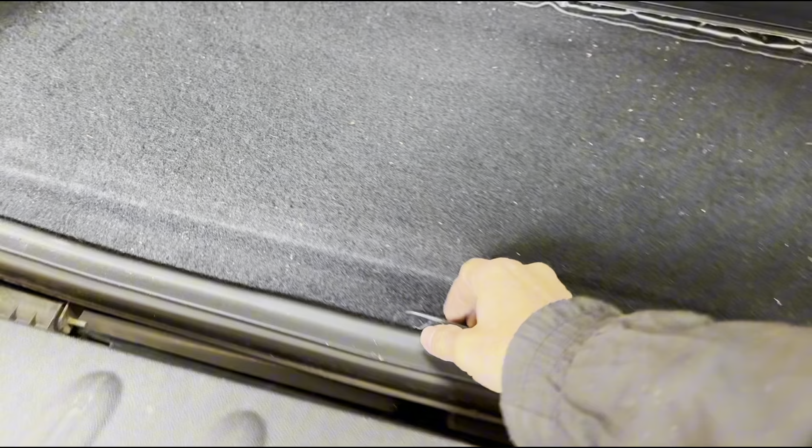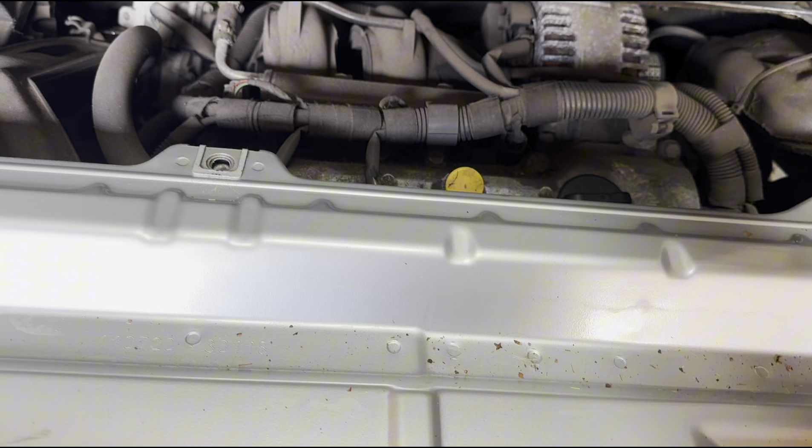And also we're going to open this door here. So then I'm going to get to this bit that's supposed to be here. I just want to lift this up, then open this little thing here, and then we can open this cap. From here, you can actually remove this little cover, but I may just put it there temporarily.

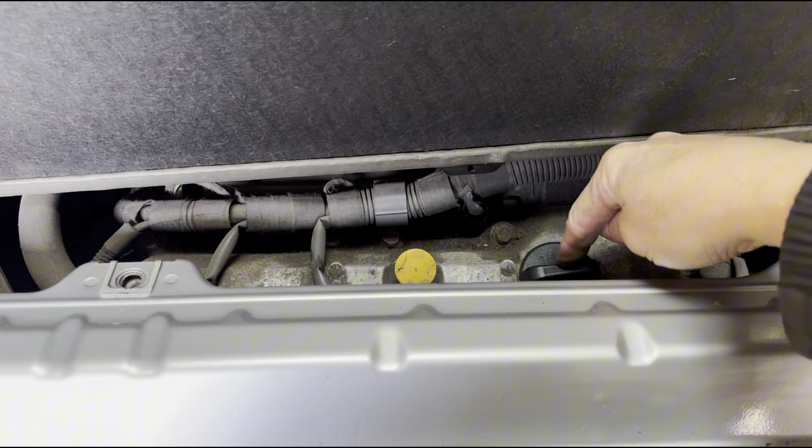I want to open the oil filler cap here and pull the dipstick as well. I just want to open those two in order to allow some air into the system while we drain it. So I'm just going to leave that there sitting.

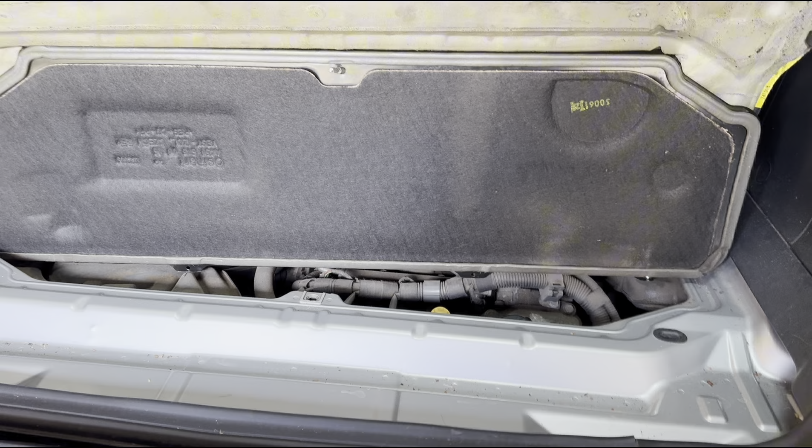Now I'm going to get the car up and I'm going to drain the oil and change the filter from underneath. It's a fairly simple process on this car.

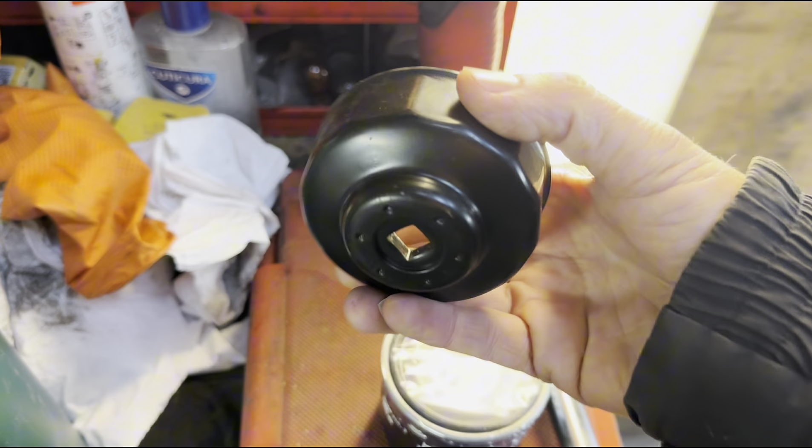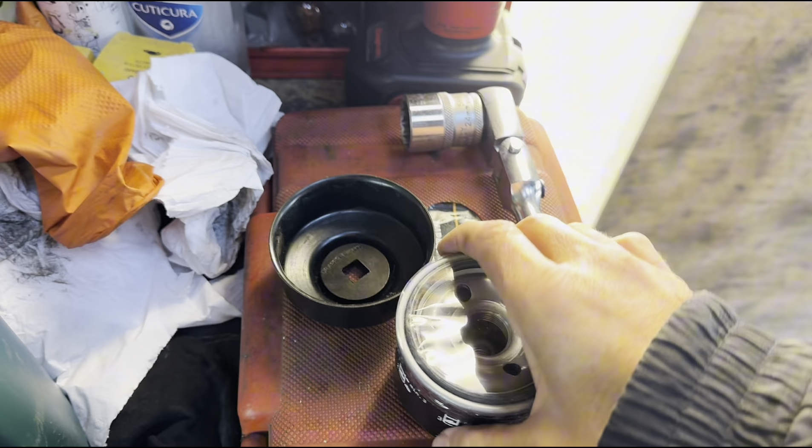So what I have here is an oil filter, and I have a tool for removing the old oil filter. This tool is a size 68. This fits that, but I'm not going to be using it for refitting the filter, just for removing.

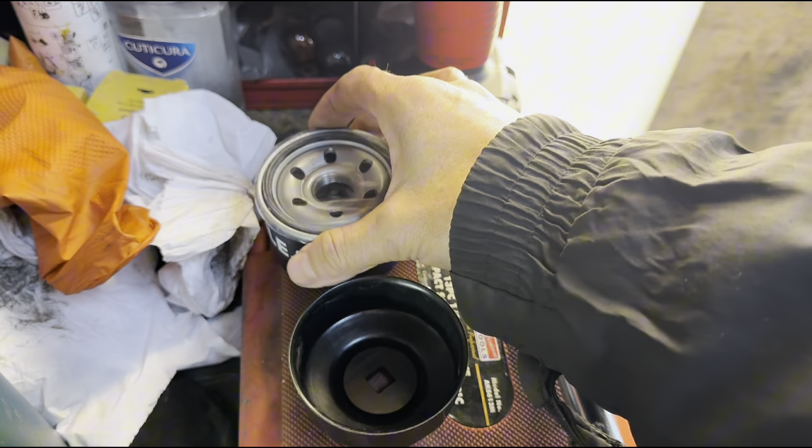When we refit the filter, we just do it by hand, hand tight. I'm also going to use a 24mm socket to remove the sump plug bolt to drain the oil. And also I have some oil now.

They do recommend 0W40. This isn't the oil I'm going to be using, because this one is C3, mainly for diesel engines. So I am waiting for the correct one to come to me. But they do recommend 0W40 or 5W40, and it's best to use the one for petrol. This is mainly used for petrol as well, but I think the C3 is most focused on diesel engines.

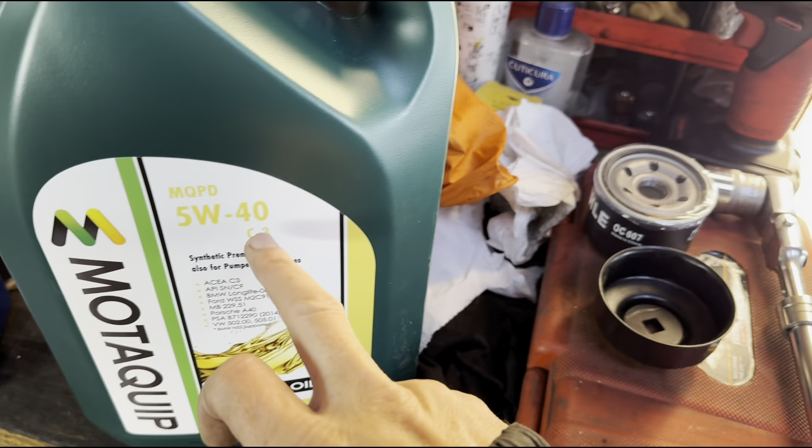Anyway, use the one for petrol, so not this one. And that's pretty much it.

So what I'm going to do first is get an oil pan. This is the back of the car, and this is the sump plug here, and we are going to crack that open.

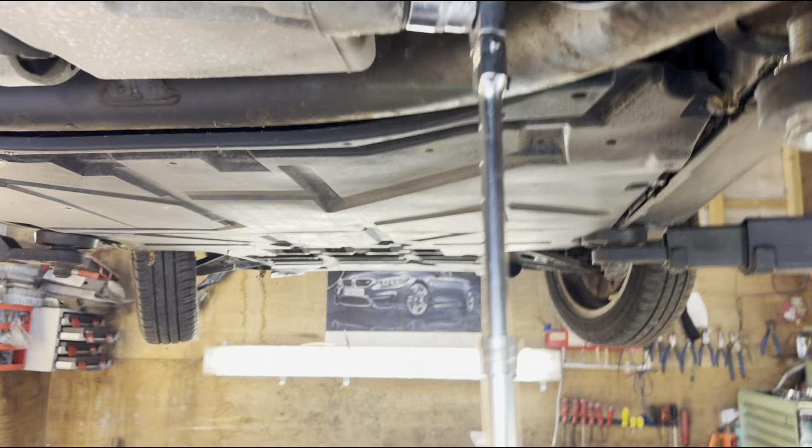It is quite a big bolt, so I'm not sure how tight it will be, but I can extend my wrench. This is a really good wrench, by the way. It was a little bit tight, but anyway, we crack that open.

Now get your oil pan underneath, and then we can take this off. Also, if the car has been running for a while, the oil can be very hot. In this case, I only ran the car for 10 minutes or so just to warm it up, so I can drain my oil and it's not really that hot.

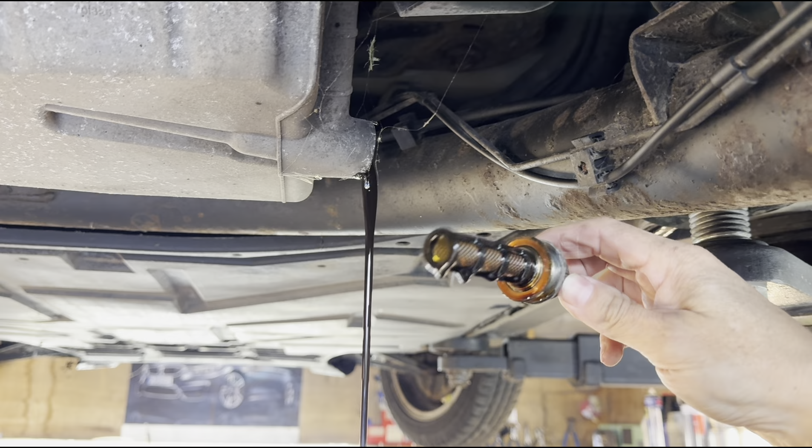Okay, there's a big washer there, and to be honest I haven't got a big washer to replace that, but it is recommended to replace the copper washer. There's a little filter there as well.

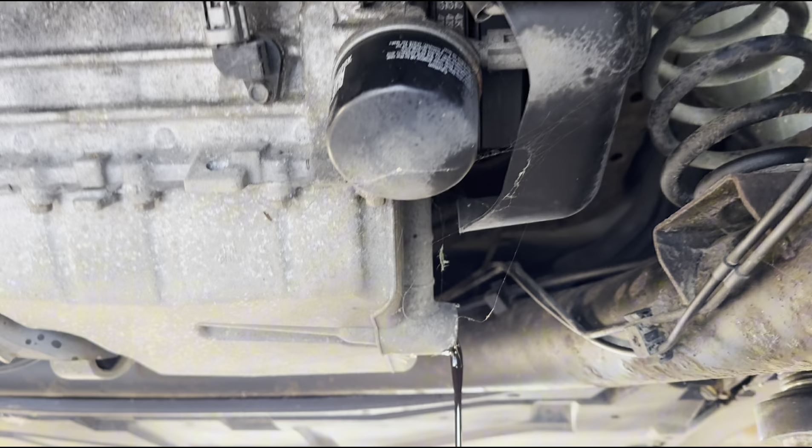So we can clean this and let the oil drain for now, and then we can take the filter out as well. This is the filter I'm using, by the way, the MAHLE one, OC607.

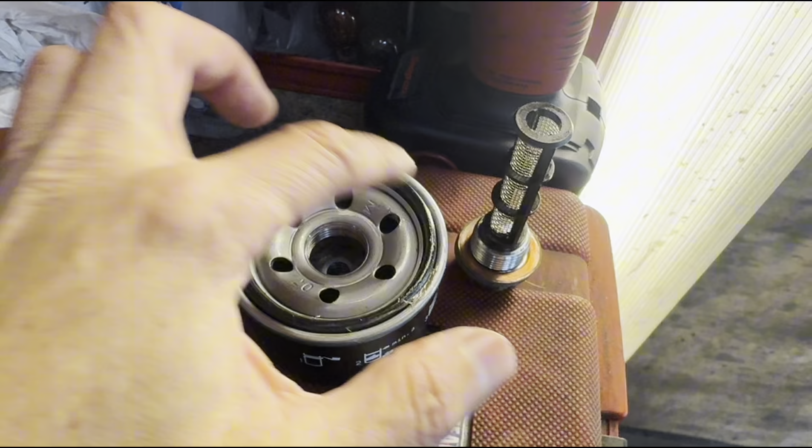I was just preparing my filter as well, so I removed the plastic cover that was on here, and I've put a little bit of multi-purpose grease on the O-ring there. You can also use a bit of oil on that O-ring. I normally do that so when we close the filter, the O-ring smoothly rotates as you're closing this.

I believe that if it's dry, sometimes it can get damaged, but I'm pretty sure many people have done it without ever having to put grease on it. So there's always different experiences out there.

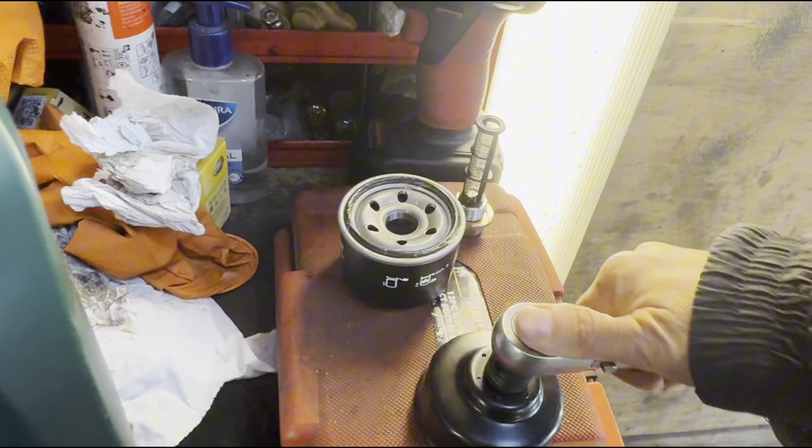And also I've cleaned that, but I would recommend, if you're doing the job and planning ahead, get a washer, which is something that I didn't, and I haven't got one of those. That's quite a big one.

So let's get this. This is still draining. Technically there is supposed to be 3.7 liters, I think my supplier said.

Now also get your oil pan sitting under that filter, because it's going to drip some oil. And so this oil filter, again, it's not supposed to be in too tight.

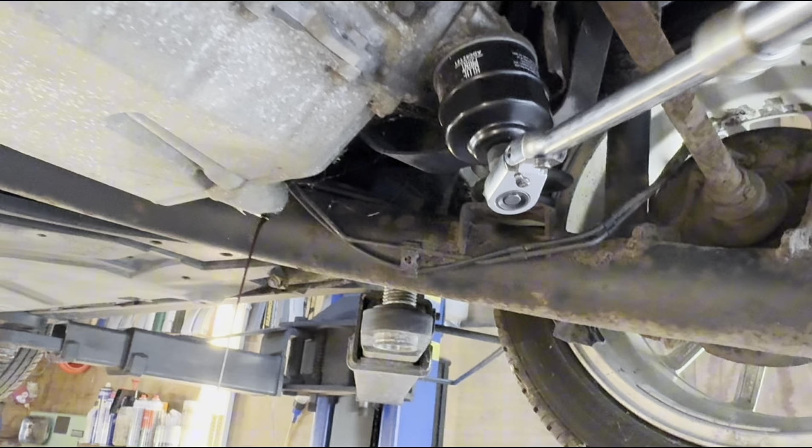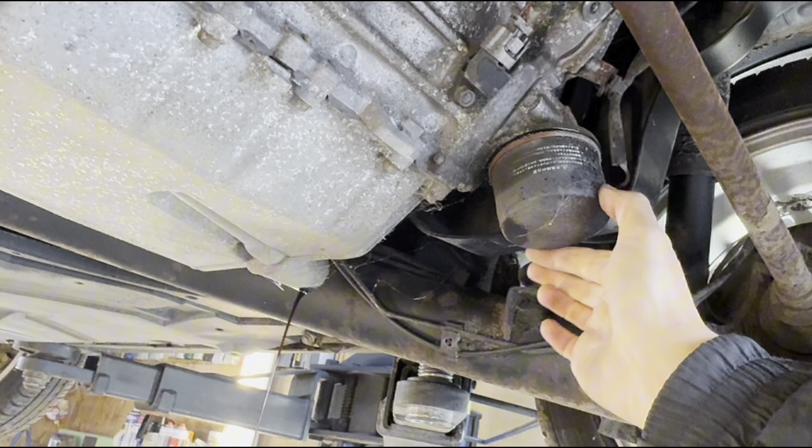The one they used, I can see, is a Blueprint one. I'm using a Mahle one. Not really a huge difference there. I think Blueprint is German, but Mahle also German. So some oil will drip.

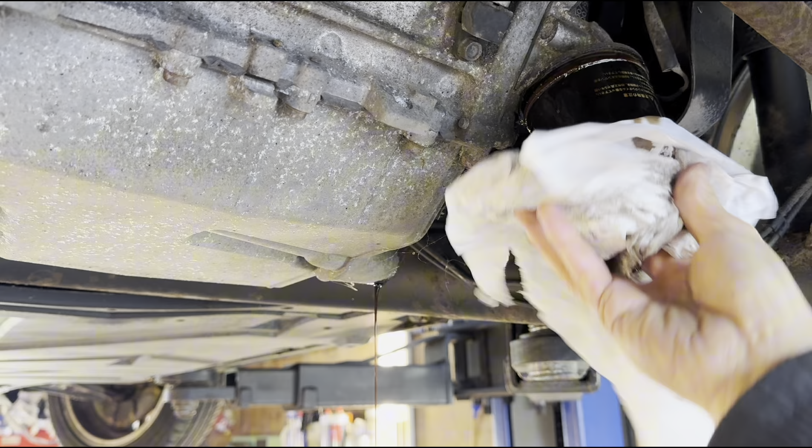You can just take it out of there. There'll still be some oil in there once you get it out, so you can drain it into your oil pan.

Changing oil and filters is always a messy job. Oil goes everywhere for some reason. If you haven't made a mess here and you're feeling lucky, don't worry — somewhere along the line you're going to drop some oil on the floor. Just kidding, I'm sure you can manage without that. I don't know why I still can't, but one day I will.

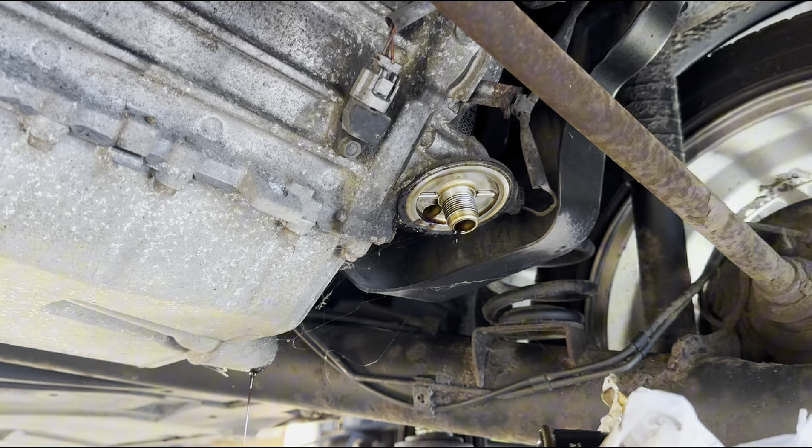Now we can let this drain for a while. We already have our filter ready, but we're also going to clean this area here, make sure it's nice and clean before we fit our new filter. What I noticed is that the filter I removed had a little bit of corrosion on the side, so I want to make sure there's no corrosion here, because that can cause a leak if the new filter doesn't sit properly. This seems to be okay, but it does need a bit more of a clean.

I may need to use some brake cleaner, which is a sort of solvent that dissolves grease, because you can see this carbon has formed around the filter. Those little things, with time, become bigger and bigger. So you don't always have to keep cleaning it, but one day it will become thicker and your oil will start leaking from the side. It's best to give it a clean from time to time and get rid of that carbon.

You can see it's coming up with my nail there, so we might be able to spray some brake and clutch cleaner, and it might melt it away.

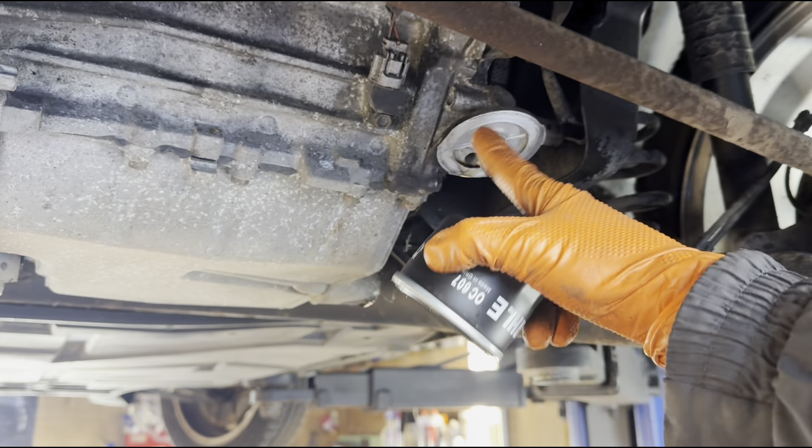Okay, I left this draining for a while as I went to have lunch. Now I've cleaned the area nicely — you can see it's nice and shiny — and I'm going to put my filter back on, the new filter.

Just tighten it by hand. Now we can put our sump plug bolt back on as well. Let's get this sump plug bolt back in there. As I've said many times, I recommend changing the washer, which I will not be doing myself today because I haven't got one.

Now I was trying to find the torque setting for this bolt, and I found some torque settings of 50 Newton meters on one site and 65 on another. It is a pretty big bolt, so what I've done is set my torque range here to 56 Newton meters, just to see how that feels. Okay, so that's 56, and I think that could easily go to 60.

I just set my range to 63 Newton meters, and we'll see how that goes. Well, there we are — I got it on 65 now. I just wanted to go in stages just to make sure I don't damage anything, but that's it. You can actually tighten it to 65 Newton meters. I thought it would be quite a lot of force, but it's pretty much doable, so I guess they were right at 65. That was done with a 24 mil.

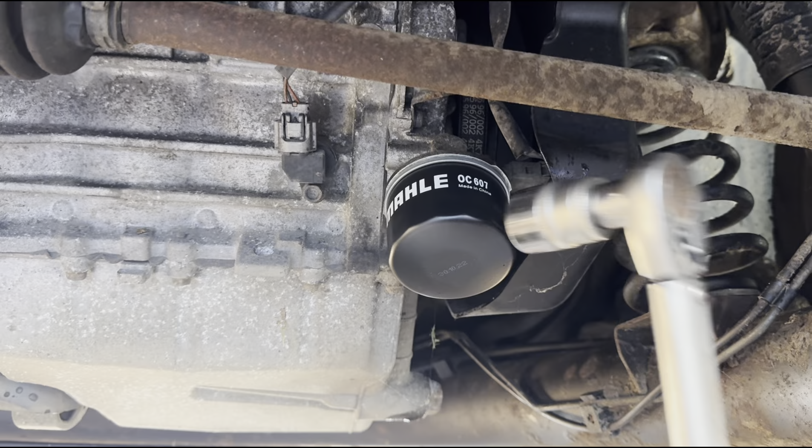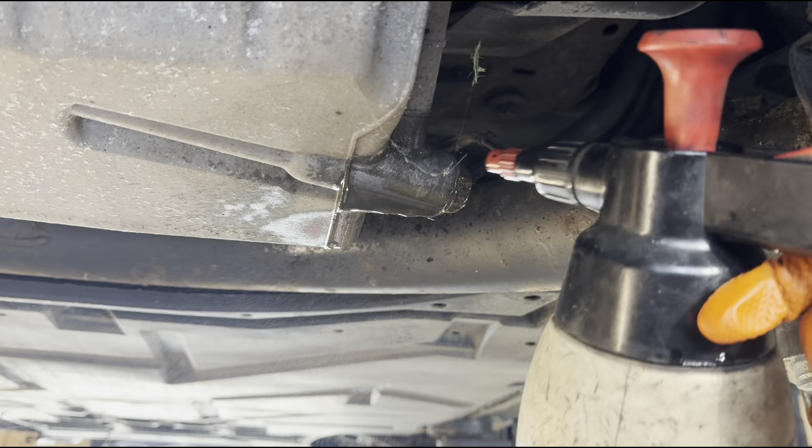So that is on. Now we can lower the car and put some oil in. Don't forget to clean the area, otherwise you might think that's a leak. If you leave it nice and clean as it was, if there is a leak for any reason — in my case it would be because I didn't change the copper washer, but if it's for another reason — you can monitor that situation. Make sure wherever there is oil you clean it, so next time if there's any oil you can try to see where it's coming from. If you didn't clean it, you might get confused as to whether there was oil you left or that it's leaking. So anyway, I'm going to lower the car now.

This fluid, by the way, is as I mentioned, brake and clutch cleaner.

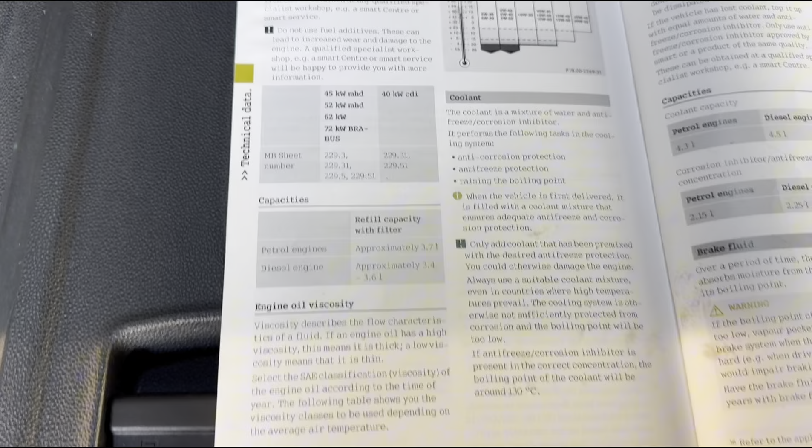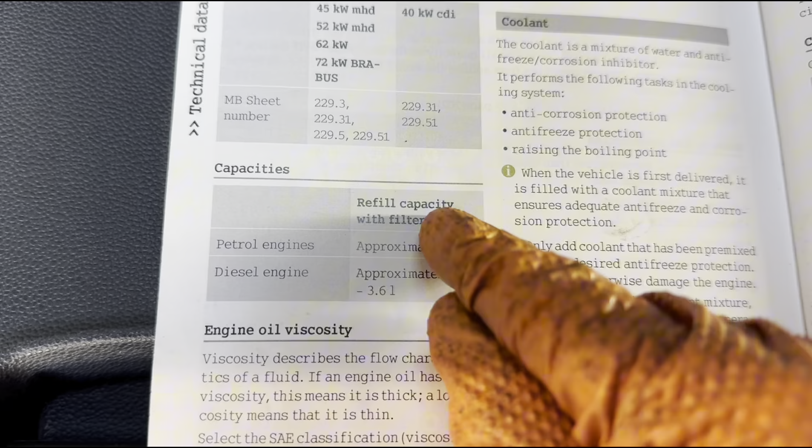Time to top up some oil. I've got my manual here, and the oil capacity stated is for petrol engines approximately 3.7 liters — refill capacity with filter, so 3.7. If you have the diesel version, it says 3.4 to 3.6 liters.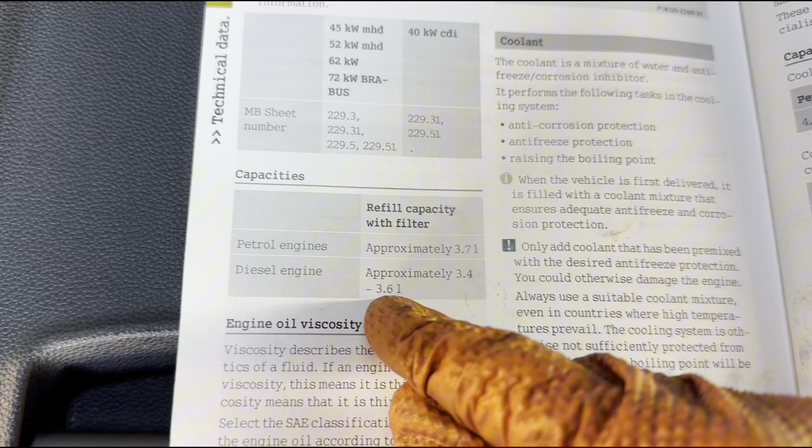So this is a 1 liter engine, the 2011 451, and it talks here about the engine oil viscosity. It asks you to choose the oil viscosity according to the time of year, and shows a list of the types of oil you'd choose according to temperature.

I'm here in the UK and the temperatures are never extreme either way, so this is why I normally use 5W30, which covers a good range of temperatures. However, if you were in a very hot country, you'd choose something like 20W40 or 20W50. And if you're in a very cold country, you could choose 0W30, 5W30, or even 0W20 in other cars.

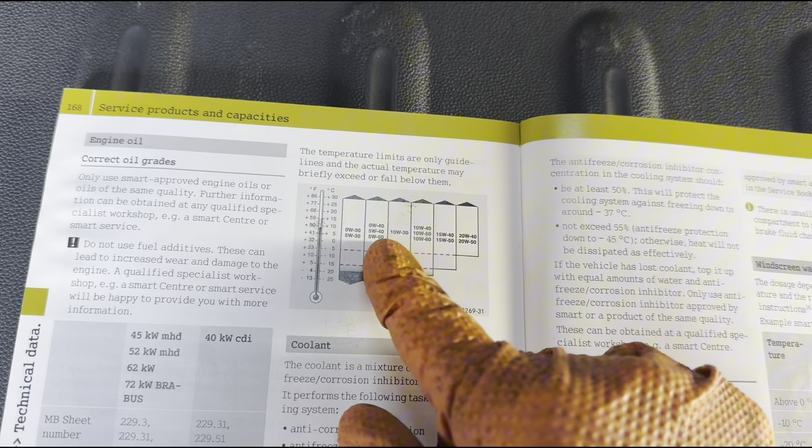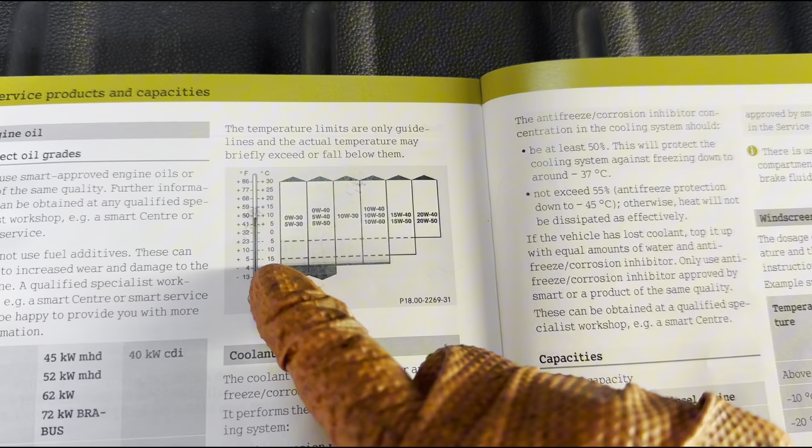So today the oil I have is 5W40, and again that covers a wide range of temperatures, down to -15, -20, and up to +30, so that should be just fine. And as we saw, 3.7 liters is what I'm going to be adding.

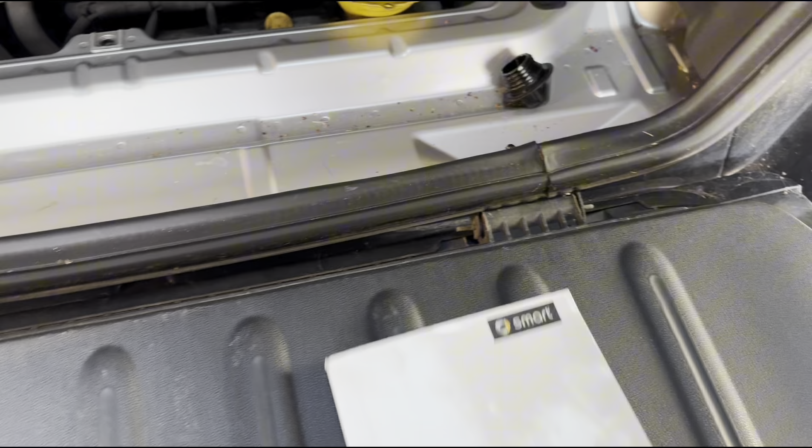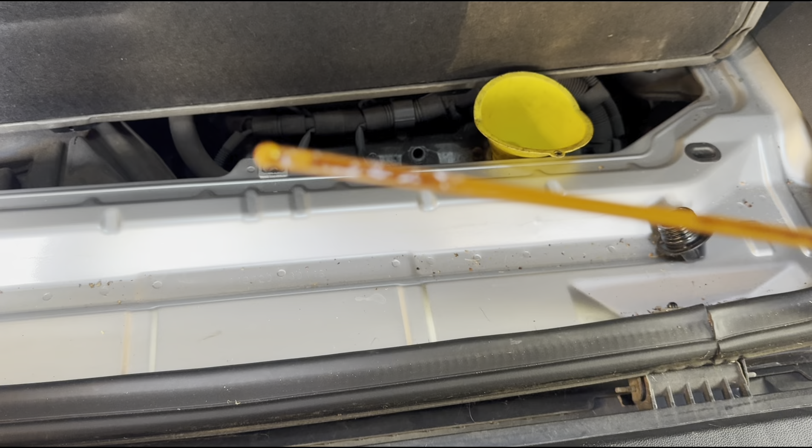I've got a funnel there, so what I'll do is pour the oil in, and then we can check the dipstick. The dipstick is here, it's quite a long one, but it does have a min and a max. We'll look at the manual in a minute, but we want to be somewhere in between the min and max, probably towards the max since we're just changing the oil.

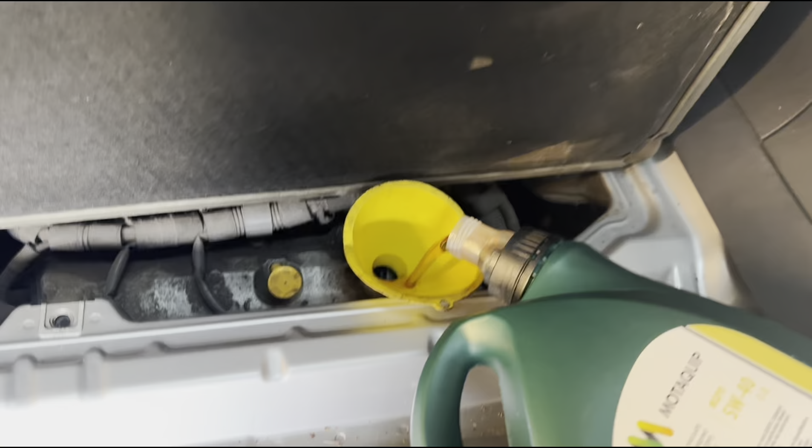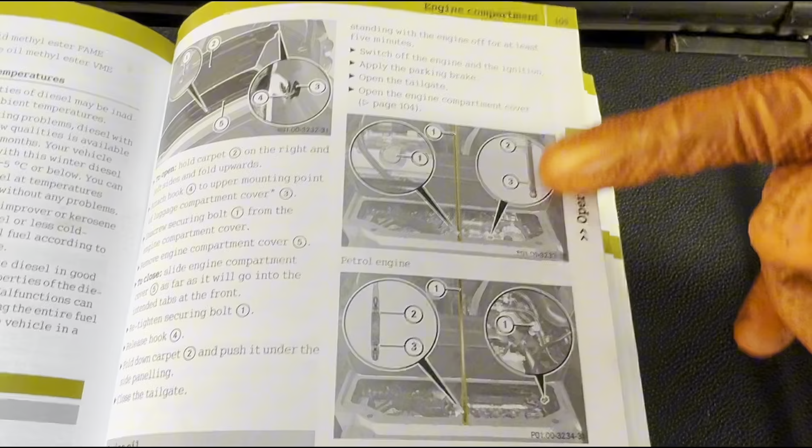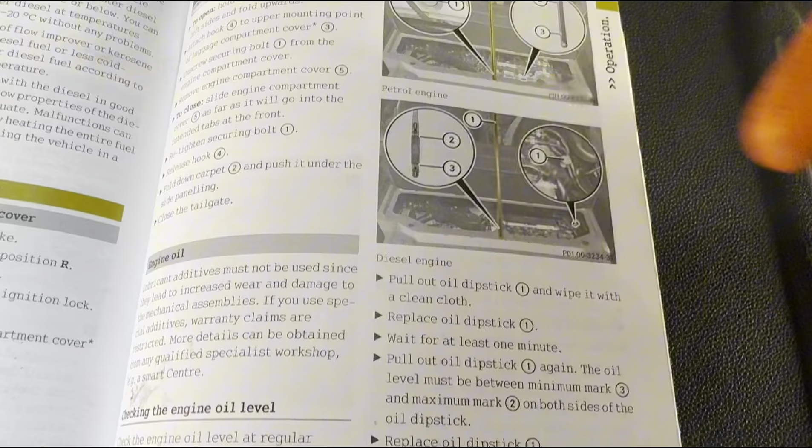Okay, looking at the manual again for the dipstick. I have this dipstick here, you can just about see there's an L and an F there, bit difficult to see to be fair. So we have low and full, and this is the dipstick type that I have. What they say is between 2 and 3 we have full and low. Same for this type of dipstick, slightly different looking, but I guess that's the diesel one and this is the petrol one.

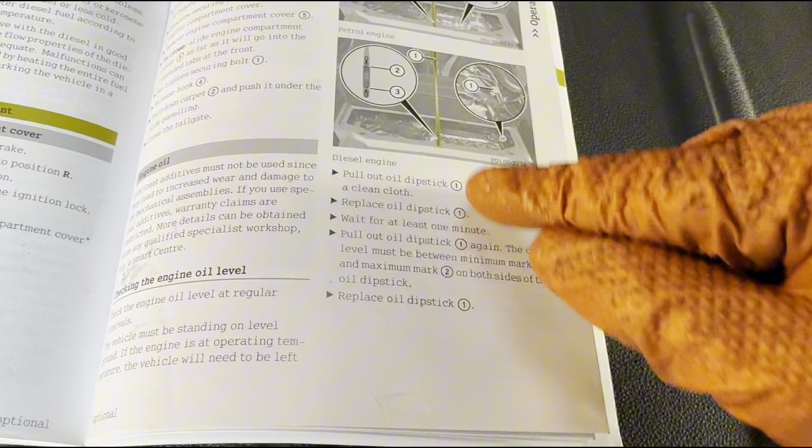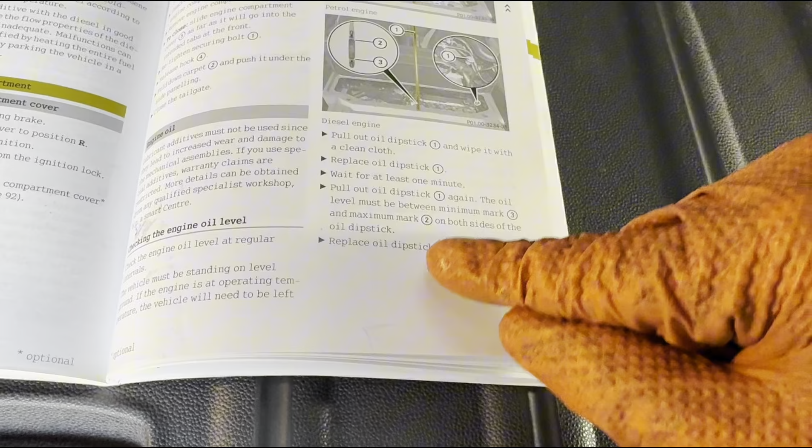It says pull out the dipstick, clean it, replace it, wait about a minute, pull it out again. The oil must be between minimum mark 3 and maximum mark 2, then replace it. You'd do that if checking the oil halfway through the year, but today we're checking it because we just did an oil change, just to see where it's at.

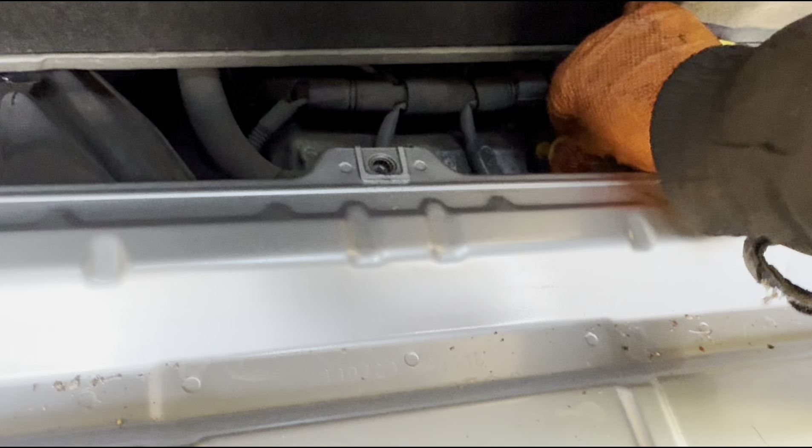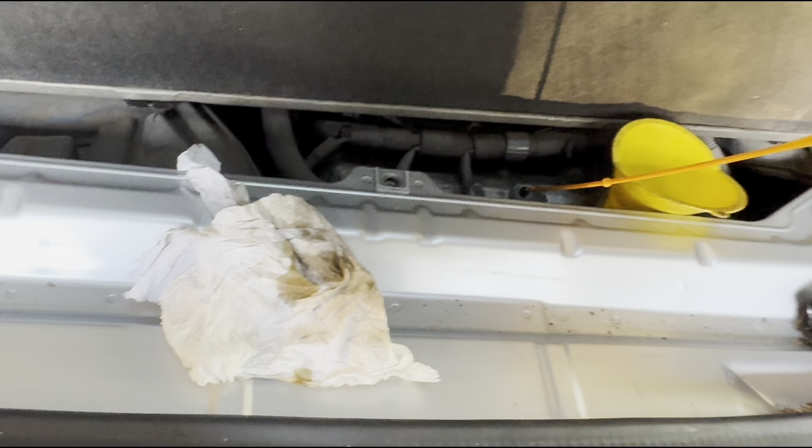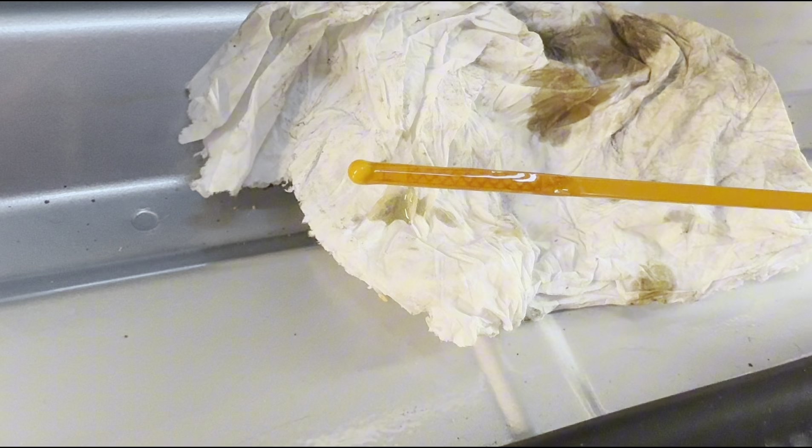So we put it in there, and I've got a bit of paper here to avoid messing everything up. We'll take it out, and I can see - it might be difficult for you guys to see - but the oil is right up there. Where the shine is, you can just about see it. It's showing a little above the full mark, which is fine, because as soon as we run the engine, some oil will go into the oil filter and remain there. If you checked the dipstick again, it would have dropped a little to the full mark.

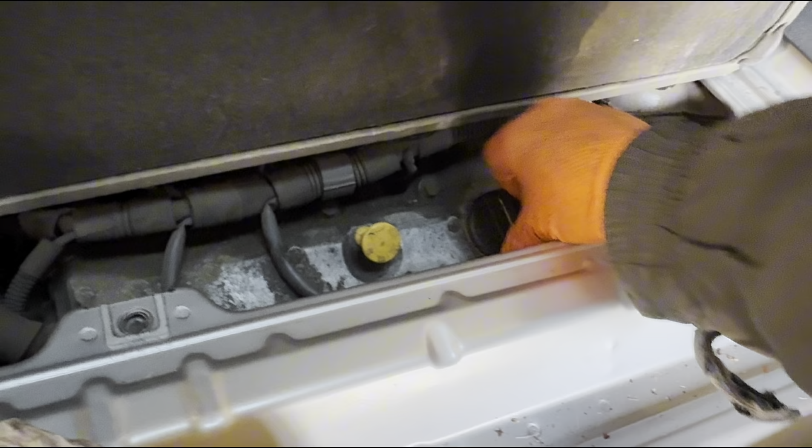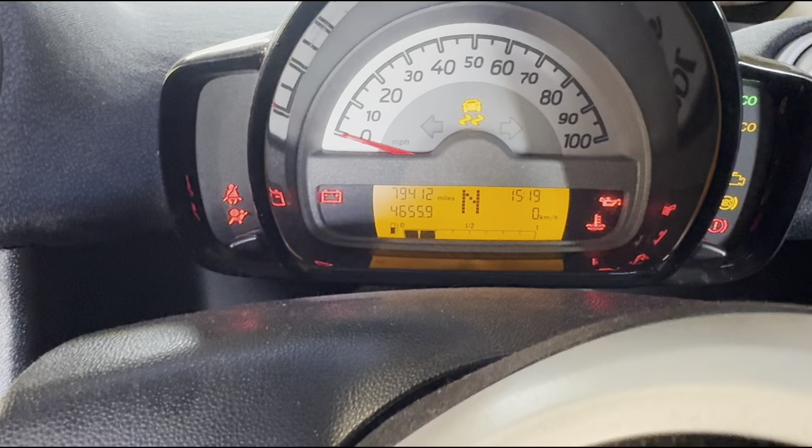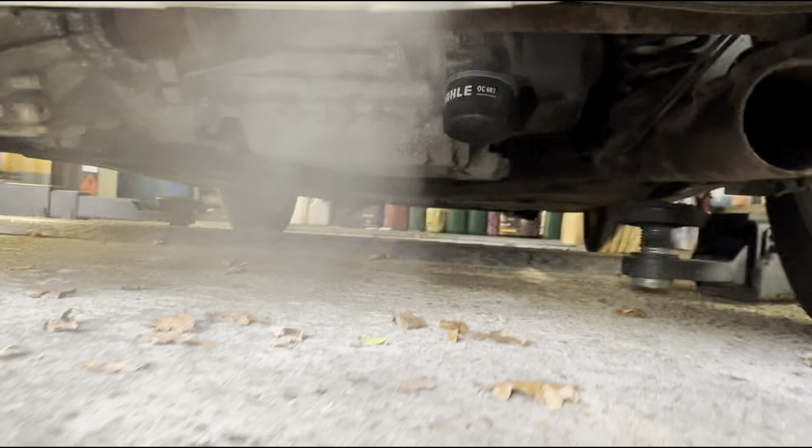I'm happy with that, so I'm putting the dipstick back in, and we can put the cover back on and start the car, just to make sure everything is running well and there aren't any dramas. Let's get into the car and make sure the oil pressure is good - the oil warning lamp has gone out. Then the last thing to do is check for any obvious oil leaks, which is easy in this car, just get down here and check. If anything dramatic happens, you can switch off the car.